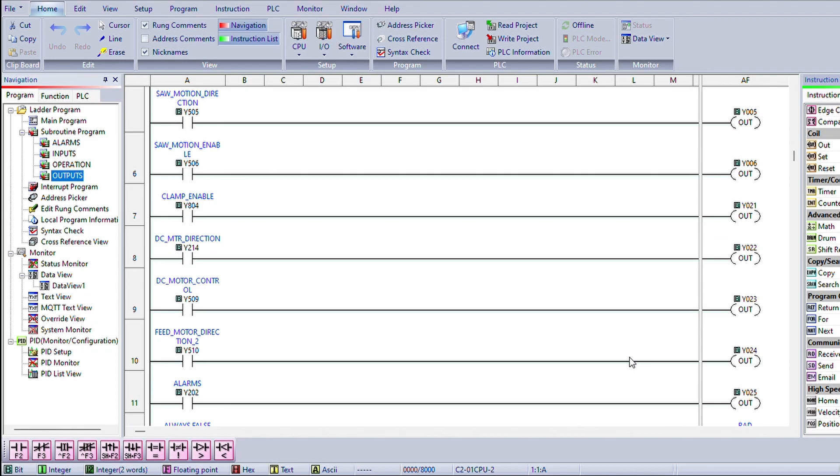To start, you can see all of our inputs here, and then our outputs. And we also have it set up for our spare inputs and outputs.

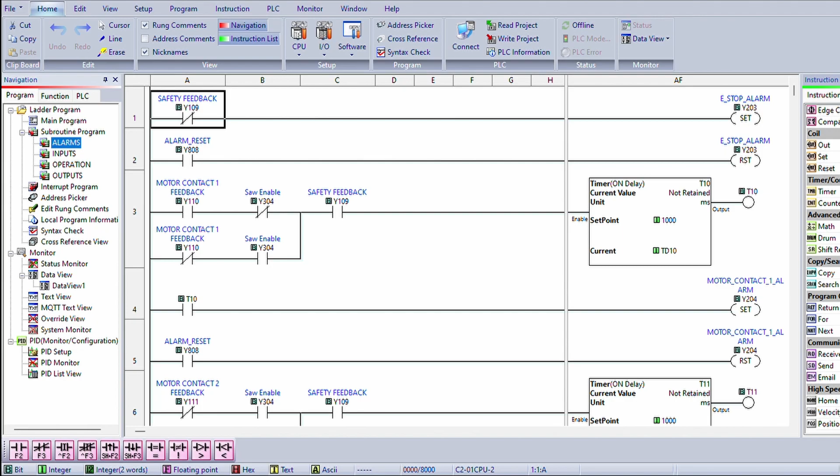Then we'll move to the alarm screen for safety, where each of our alarms are set whenever the feedbacks to the system are received or not received, depending on the condition. And all of them are reset with the alarm reset and having the original set conditions to be false. Also, all of our alarms are interlocked and then mapped back into the operations routine.

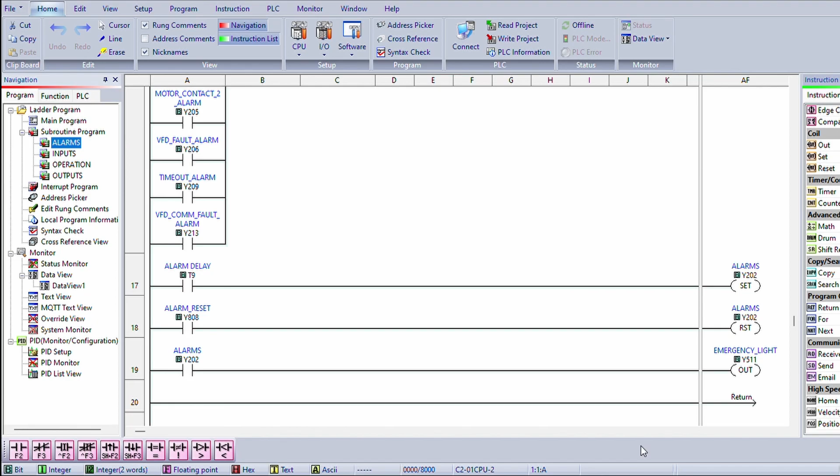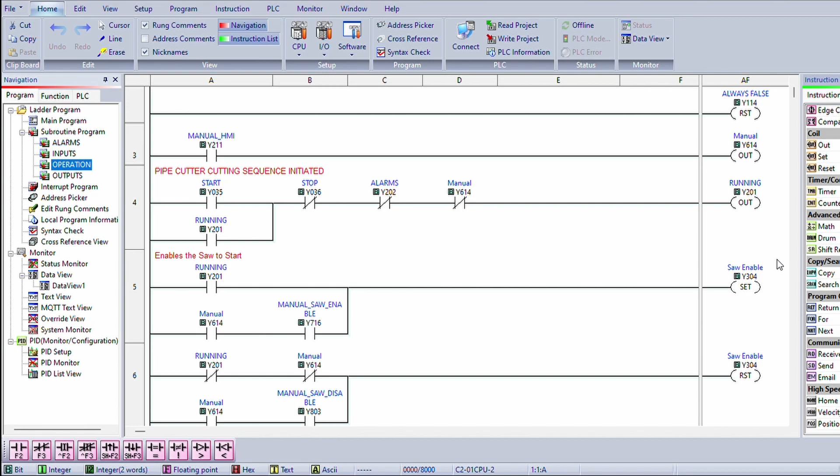So here we have our operations routine, where you have your manual mode and your automatic mode. Your automatic mode comes off of this running bit and controls all of our inputs and outputs. Here we have our VFD communication set up, and the control of when to run the VFD or when to run the conveyor motor in reverse, forward, and when to stop it.

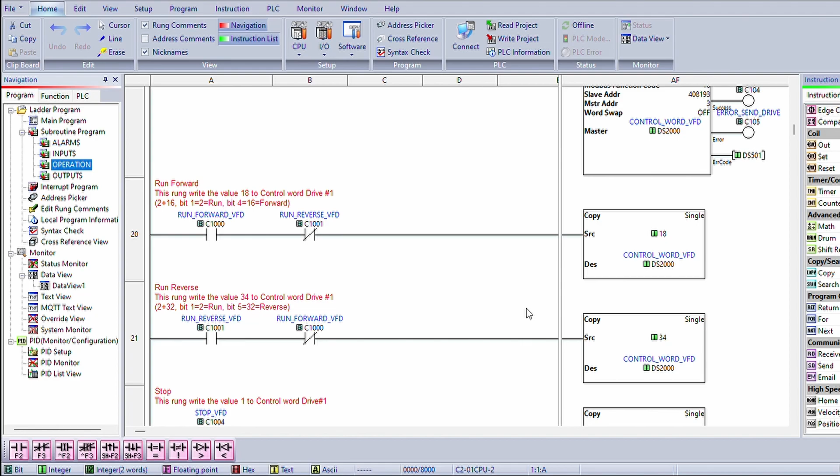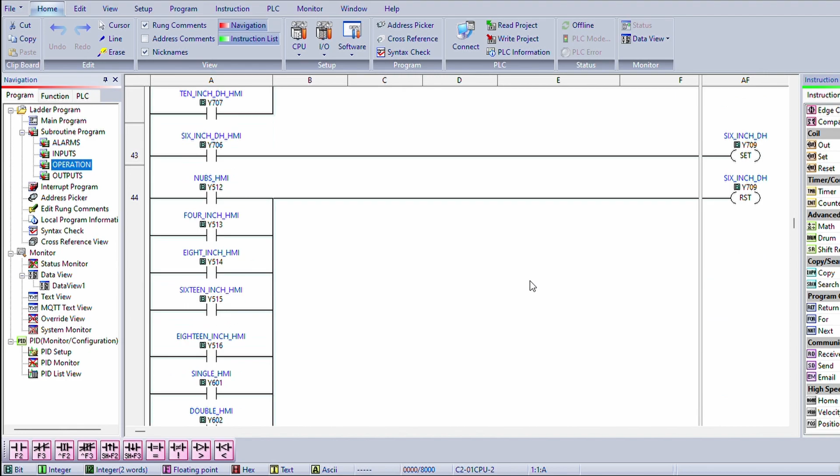We also have our HMI latching code, which allows a user to select a button on the HMI and keep that bit on throughout the program. We then have our feed motor code to control our stepper drive and our stepper motor and all of those conditions. And then we get into our zero counter for zeroing the first pipe.

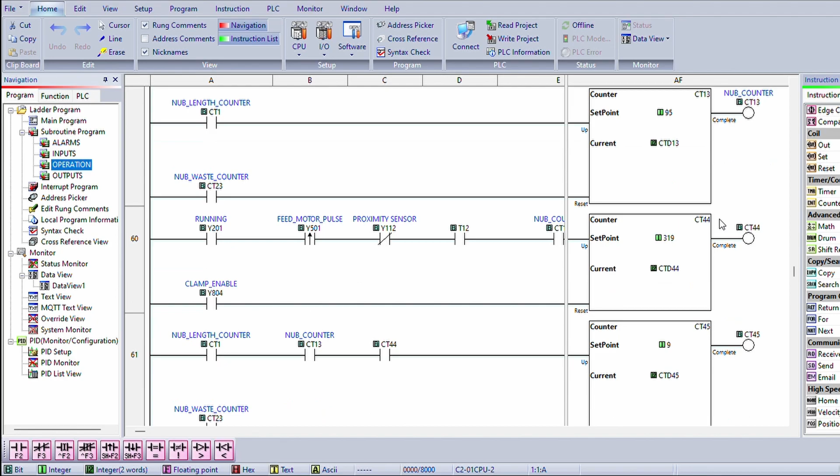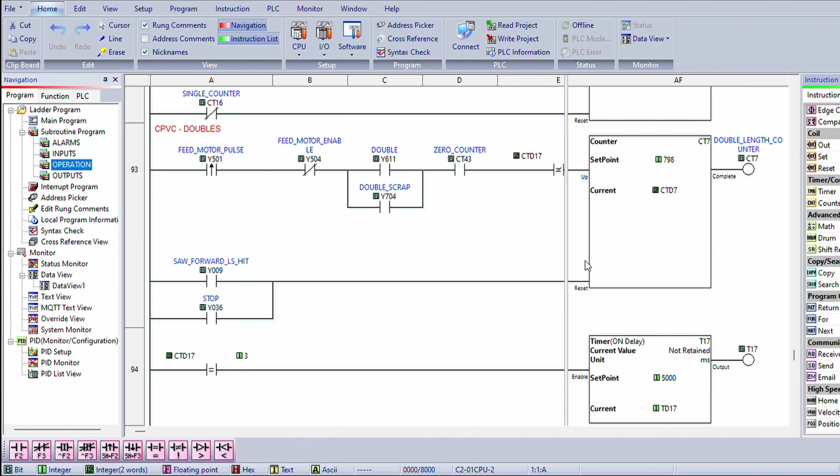And then, depending on your selection, you will have all of these other counters to keep track of each pipe in the system. We decided to use doubles as our example, which is the 27-inch length. And here you have your conditions to count your steps for the first 3 pipes. And it will reset after each cut.

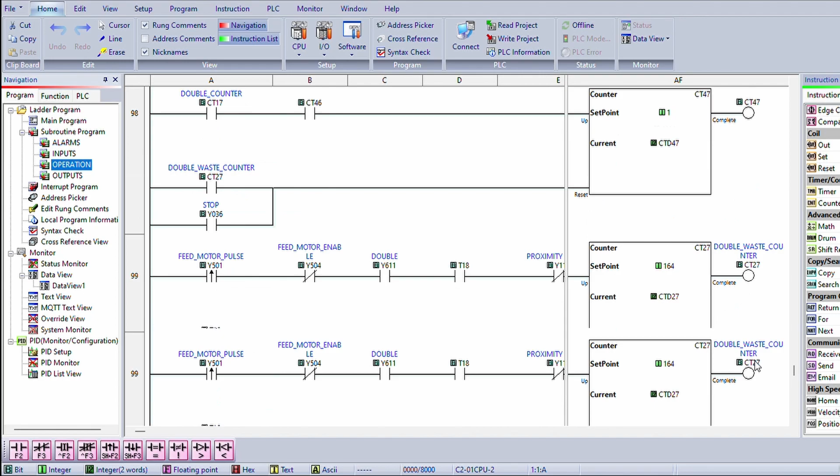And then we have our counter to keep track of the last pipe that you can get out of a 10-foot section. Once this is done, the stepper motor will be enabled to push out the waste and read the next pipe. And then at the end, we have our saw motion directions and the control for that stepper motor to bring the saw forward and back.

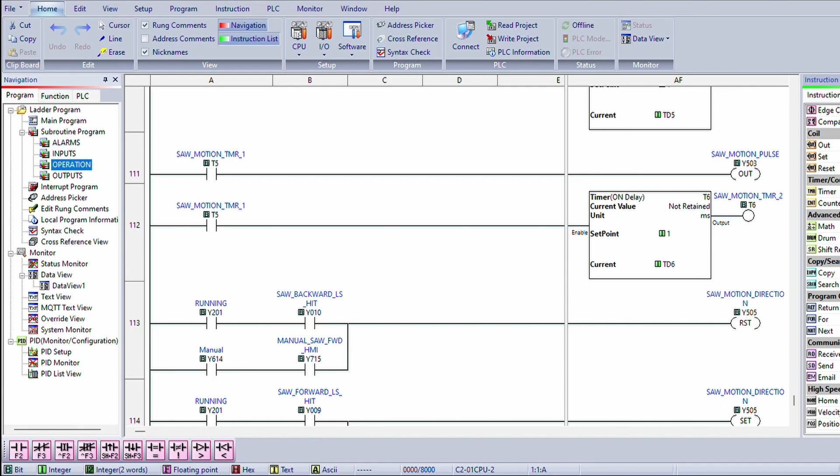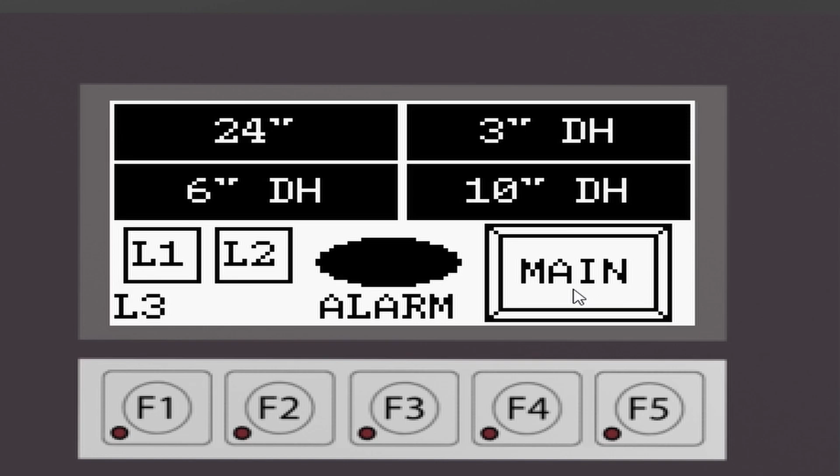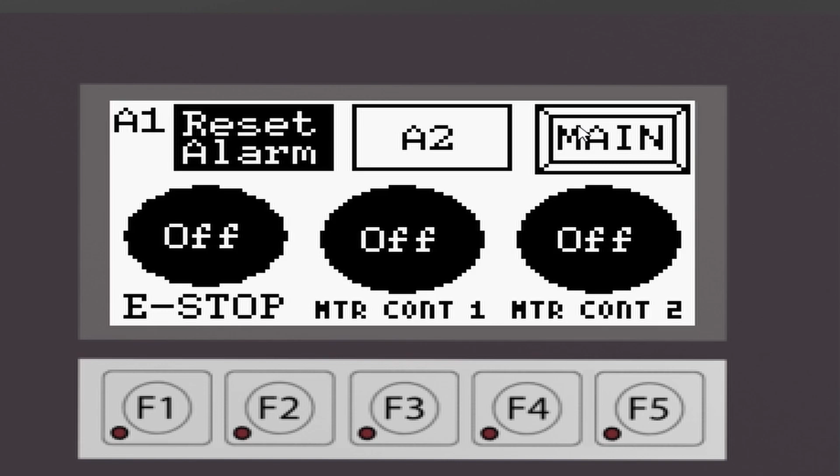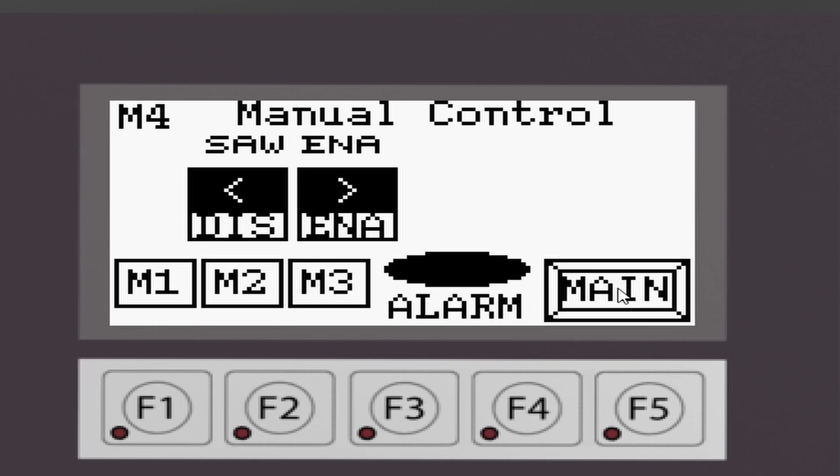Taking a look at our HMI screen, we have our 3 length selection buttons with all our preset lengths. We have our alarm screen button with all of our alarms and faults for the system with a reset alarm button. We have a manual screen for full manual control of the system. That's it for the HMI.

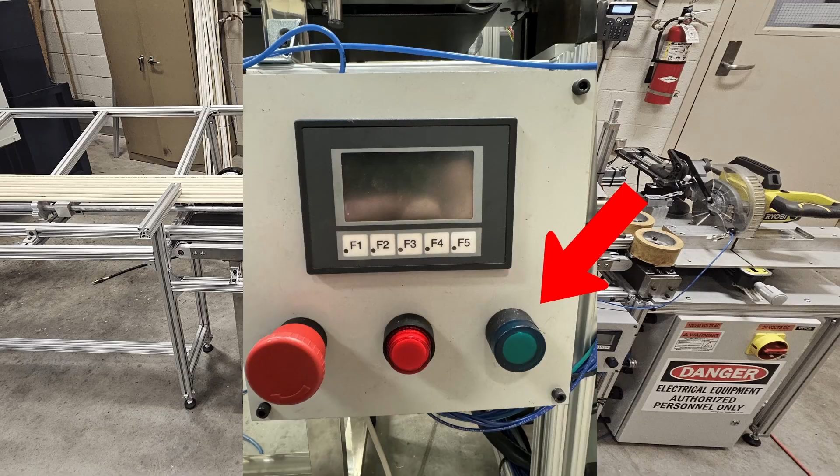Now that we took a look at the HMI, let's take a look at the other controls on the control panel. Along with the HMI, we have our e-stop, stop button, and start button. So let's now take a look inside the panel of the automated pipe cutter. Starting at the top, we have our 3 stepper motor drives, our network switch, and our positive and negative buses.

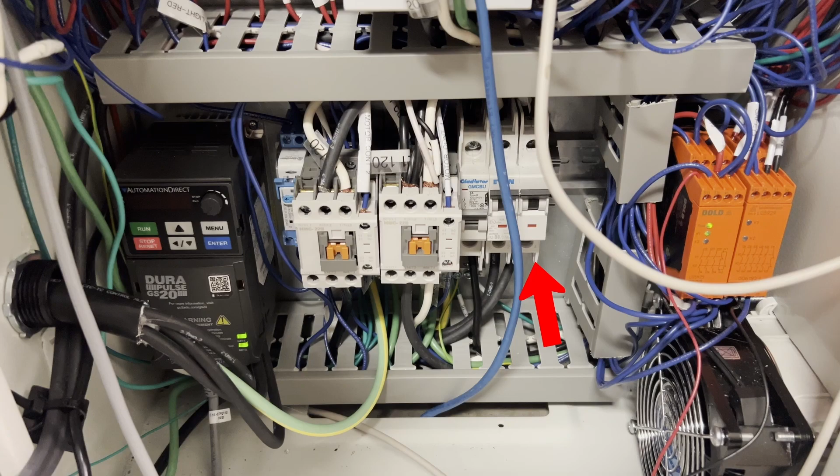Moving down to the middle row, we have our DC motor direction relay, DC motor enable relay, emergency light relay, breakers, our 24-volt DC power supply, and our Click PLC. Now moving down to the bottom row, we have our VFD, 2 motor contactors, our AC power VFD breaker, a power supply breaker, and our 2 safety relays. Now let's take a look at a live demo.

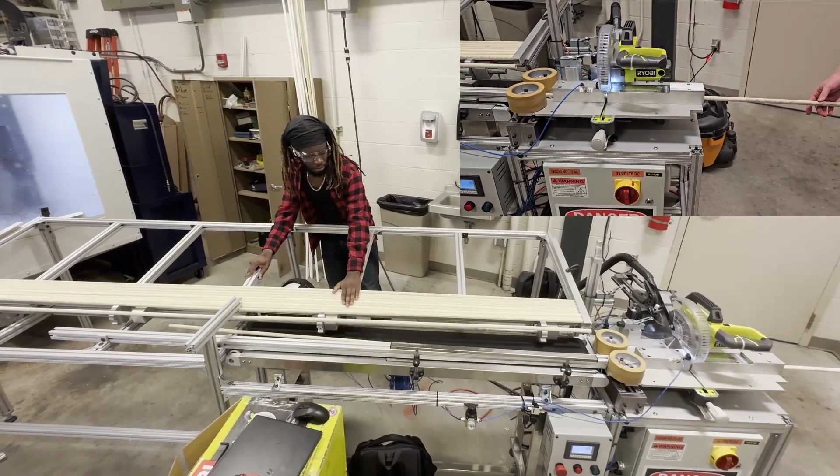The industrial automated pipe cutter has a bin that holds the CPVC and PVC pipe. From there, the pipe rotates down onto the conveyor, which then is fed into the feed rollers. From the feed rollers, it is fed into the saw, where it is clamped down by a pneumatic clamp, and then cut with the miter saw, and the finished cut length is outputted at the end.